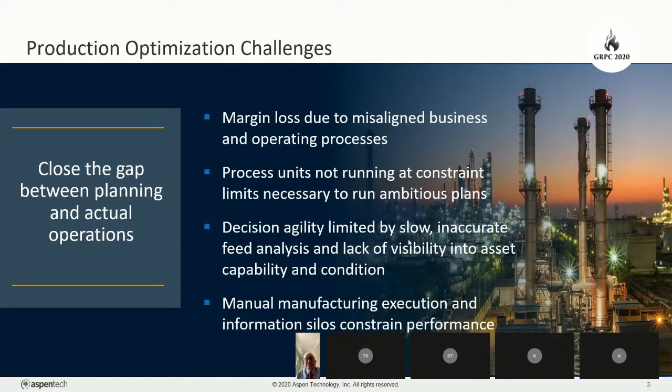To actually achieve plan, decision agility is limited by laborious and tedious manual processes such as feed analysis, or lack of visibility, or both, typically spread across many departments in a refinery. And often, due to these different departments, you see manual execution because information is contained in silos and not integrated across the entire value chain. So that sets the premises for production optimization.

Now, helping our customers implement production optimization is what we're good at. It's what we're proud of. It's what we do every day. Here I've listed some examples where we successfully delivered value, and I truly believe we can do exactly the same for your organization.

For example, we implemented our PIMS advanced optimization platform at a global energy and chemicals company across more than 15 sites. At Rompetrol, we had cumulative benefits of more than $45 million US over a period of 5 years by implementing our advanced process control technology.

So, having said that, I believe there's a gigantic opportunity still to deliver value when you look at production optimization in an integrated fashion. Let's go to the next slide.

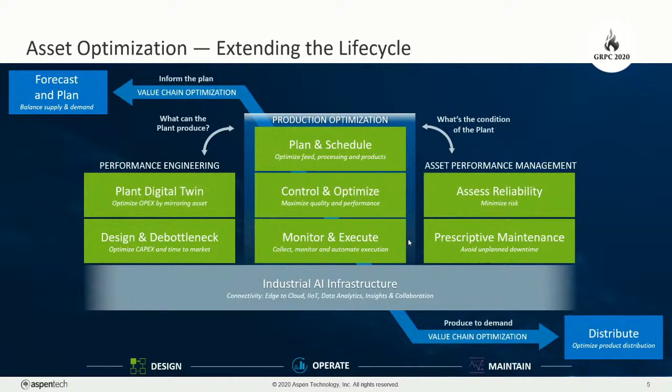We believe we can drive new levels of collaboration, but specifically insights and automation across all these functions by providing industrial AI infrastructure to all our applications, so we can help our customers achieve a higher level of asset optimization and ultimately unlock the smart enterprise. But for today, I'm going to focus on the production optimization bit, which is really the fundamental building blocks for a future smart enterprise or self-optimizing plant vision.

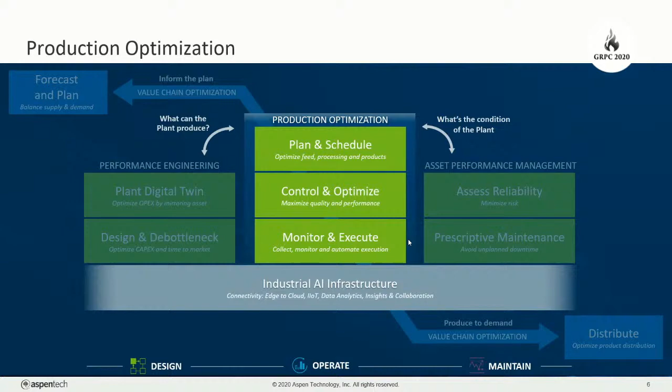So if we look at the production optimization solution, it helps address margin leakage all across your supply chain by connecting all of these business processes into an integrated workflow, as you can see here. Our production optimization is a unique solution that provides a holistic, integrated solution that unifies all these different functions. So when we look at the different layers, the first one is the digital twin.

Is your planning model up to date? Do we have the latest representations in our LP? Do we have a tool available that can use machine learning and smart algorithms to provide timely failure alerts? And that could feed into the planning and scheduling layer, where we do planning and scheduling, right?

Feedstock purchasing and scheduling - we adjust the operation based on day-to-day disruptions, which could be maintenance related, feed logistics, or product downstream delays that could cause the plan to not be achievable, and the schedulers then have to re-optimize the plant. That's why we see planning and scheduling hand in hand throughout the operating life cycle of a manufacturing plant.

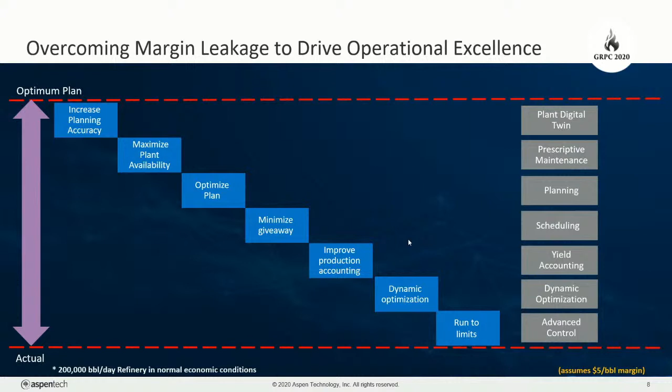Okay, so why is margin leakage so important? We saw in the previous integrated diagram that if one of these functions is suboptimal, there is margin leakage, and this slide illustrates that very nicely. This is based on our internal experience with many clients globally, and it's indicative.

What you can see, for example, if somebody would not have an integrated planning solution in place, that the margin leakage could go up to 50 cents a barrel, and the synergy between all these different functions, we believe, drives very high values and goes into the tens of millions of dollars per annum, depending on your complexity and depending on the throughput of your plant.

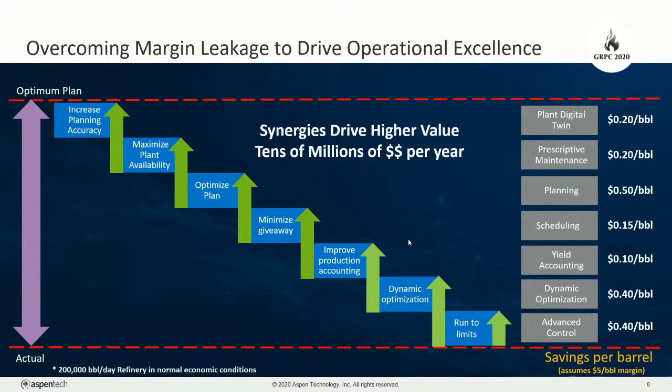Okay. And I think this is a very, very compelling reason to minimize margin leakage. And this slide, our GDOT solution, is basically a platform that is used to solve a variety of coordination, but also optimization problems in refining and olefins.

So the GDOT models themselves derive from our planning models, for example, FCCs, hydrocrackers, reformers. And so the reactor models in GDOT are similar to refinery LP models, albeit that we actually include non-linearity there where we feel that is beneficial, such as a conversion unit, an FCC, or a hydrotreater for that matter. And so they are more detailed models than you would typically find in an LP model.

And for this reason, GDOT actually incorporates best of both worlds. On one hand, it's similar to LPs, but on the other hand, we incorporate more detailed and complex models to accurately represent the units. And as you can see here in the scheme, it's a closed loop optimization.

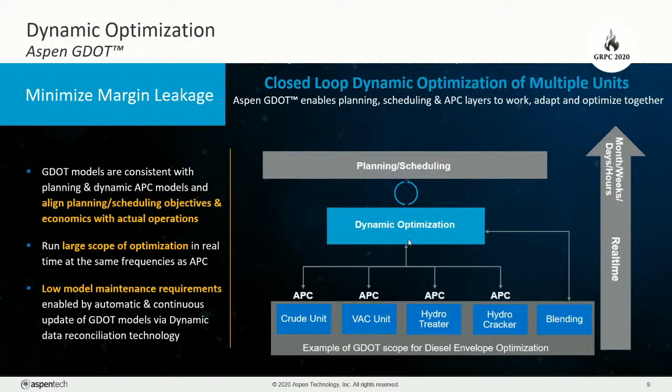Here you see an illustration of our gate-to-gate scope of optimization, and as you can see, here's a middle distillate envelope. Our solution actually is a flow sheet driven interface with a standard database for different process units, and so setting up these models will allow consistency with planning and scheduling as they are in the same application. These pre-configured templates also simplify the maintenance for the user and allow users to focus on analyzing the results rather than focus on complex model integration.

So, what are some of the key success stories? In distillate processing, we've shown to increase overall diesel production by 10% at certain clients, and also reduce the average quality giveaway, and this was worth $4 million to $10 million per annum.

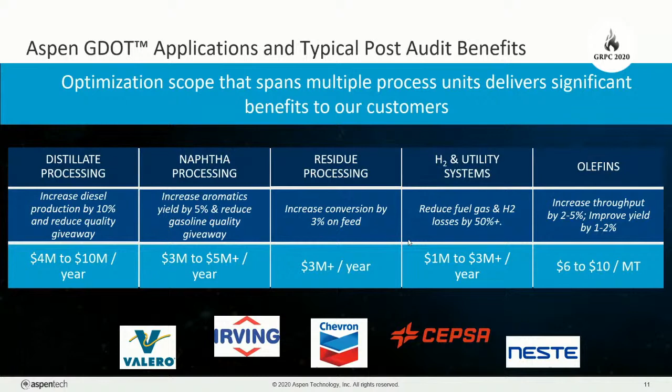So many global companies have already implemented GDOT. You can see here some of the logos, a sample of customers that have actually presented at public seminars and public events. As you can see, GDOT has quite a wide range of useful applications.

So here's a case study. The refinery here was the Pembroke refinery, a Chevron refinery in the UK, and they wanted to go beyond the individual APCs and improve the profitability of the refinery. So we applied GDOT there, and it optimizes entire production trains from middle distillates to kerosene and even naphtha by coordinating multiple process units, all closed loop, with optimization cycles of around 1 minute.

And actually we achieved a 10% increase in diesel production, which in that year was worth $10 million per annum increase in margins. And a quote from the refinery is that the GDOT system allows operating instructions and strategies to be consistently implemented, minute by minute, day and night, on the weekend, all driving towards a more profitable and consistent operation, and reducing the margin leakage. So this continuous coordination is really the key to success in production optimization.

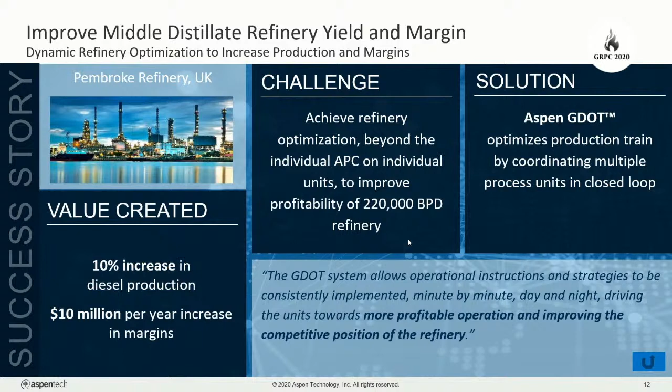Finally, if you remember, I presented the digital architecture earlier, and another key dimension is asset performance management. Unfortunately, today I only have 10 minutes, so very quick. Actually, with our asset performance management, we can expose the condition of the equipment or process by making prescriptive maintenance information available to the planning department. So this enables you to plan interventions ahead of time to either reduce the maintenance cost or to improve the margin leakage that could be caused by an unscheduled event, because you can plan for it well in advance.

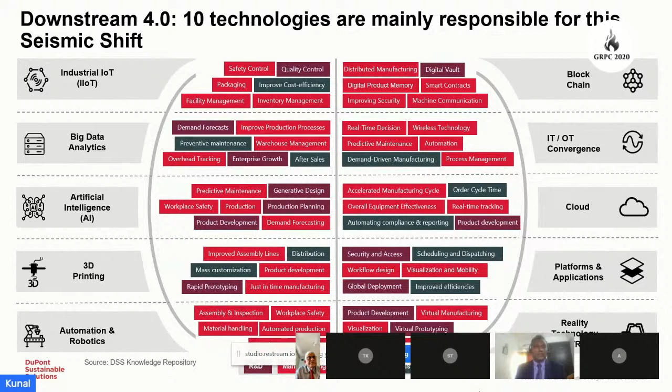And then the why and how part, is it understood even by the management? What are the implications of not transforming, of not adapting to completely new ways, taking a bold step and transforming the organization? And how to do it in terms of process, technology, and more importantly, people - how to develop a culture of change which is accelerating.

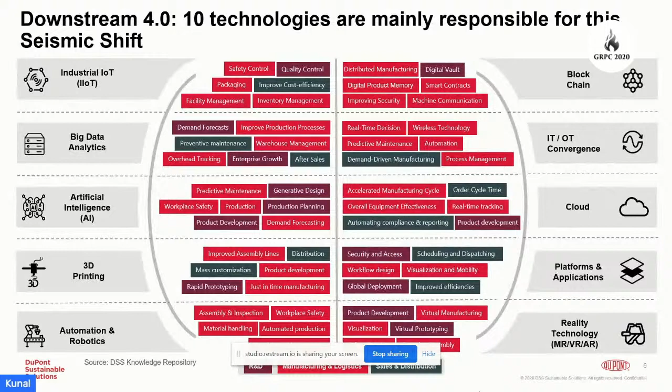A lot of leaders are having a thought around culture and making it one of the key aspects of the transformation that is coming in. Because culture transformation is an implicit part, and often the part which makes success a reality. Without cultural transformation, success can never be achieved.

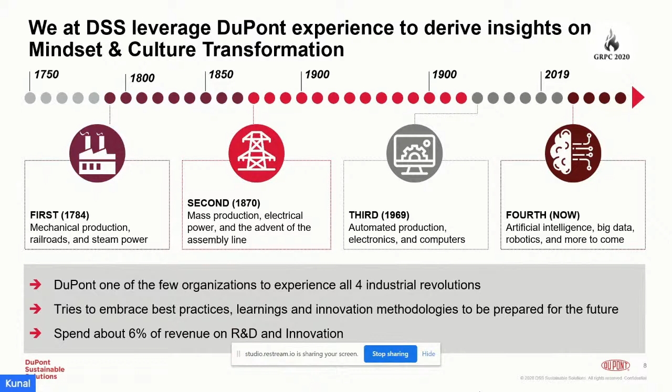At DuPont Sustainable Solutions, we leverage the DuPont experience to derive insights on mindset and culture transformation. At DuPont, we have experienced 4 industrial revolutions, starting with mechanical production and to date with the new technologies coming in. And so we derive our best practices, learnings, and methodologies from what we have seen during this course of time and what we have learned and implemented.

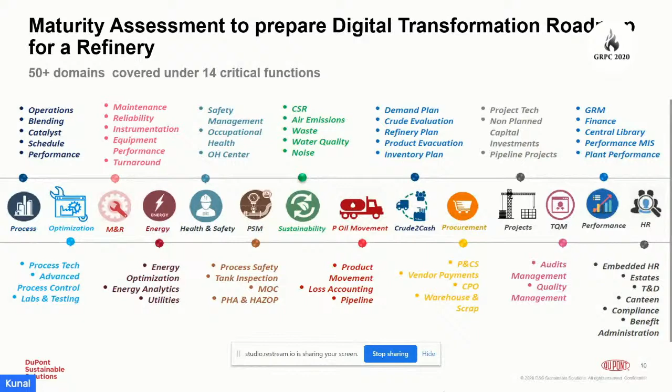The approach that we adopt is in terms of process maturity and digital maturity, with the people aspect inbuilt in both process as well as digital.

For example, if we see for a low process and low digital maturity, in an organization where the processes are not really matured, we need to enhance the process, find the gaps in the process, enhance them, and enhance the systems. Accordingly, the competency of the people also needs to be enhanced to that level to make it a success.

Going on to the second dimension, which is high process maturity but low digital maturity, we need to upgrade the systems and let people know what upgradations are required and how the systems will function.

Similarly, on the low process maturity and high digital maturity quadrant, we try to do a system integration, a dashboard connectivity, so that people can understand how things are integrated and enable the functioning of the processes accordingly with the digital maturity available.

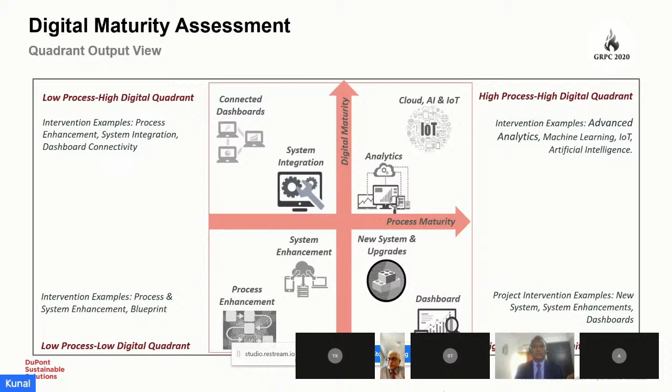The final quadrant of high digital maturity and high process maturity requires significant efforts in terms of competency building and deployment of technologies, be it advanced analytics, machine learning, Internet of Things, or artificial intelligence.

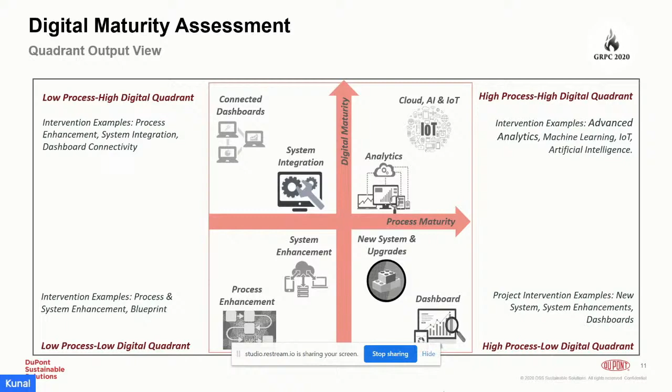After doing this whole piece, assessing each domain onto this methodology, we also do a business criticality assessment of each of these domains in terms of how critical it is from a business standpoint, so as to prioritize the investment in implementation.

We do an assessment including people as a part of both process maturity and digital maturity, and then talking with people, getting their views, and understanding from a business standpoint, we give a business criticality score to each of these. And then we define the interventions that are required in each of these domains under a particular function, going across for all functions and then enterprise wide across the value chain.

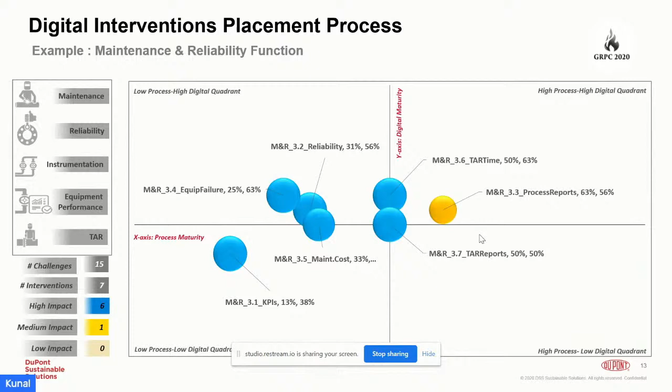So then we placed around 7 digital interventions, 6 of which had a high impact in the organization and 1 had a medium impact, be it turnaround time, process reports, and so on and so forth.

Then we did a project plan around each of these implementations. The duration, everything is mapped out in this particular chart. The digital interventions take a little time, but the organization capability and the transformation from a culture specific point of view takes a longer time. This is where we help our clients in hand holding, making people understand the technology implications and bringing turnarounds.

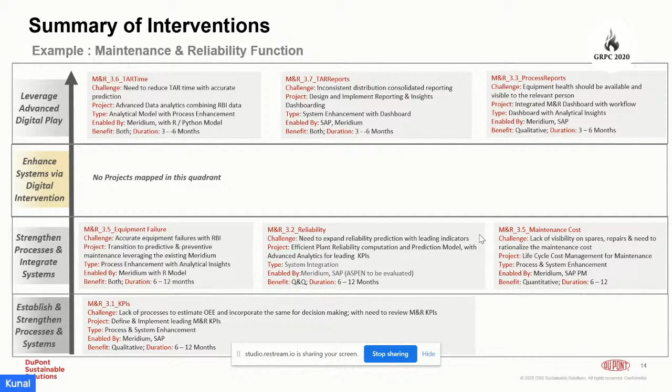Similarly, from a digital assessment perspective, since we have taken the case of maintenance and reliability, the suggestions for IoT came up, integrating them with the asset management software so that the maintenance in charge can get equipment health in real time through KPIs in terms of demonstrated health meters, correlate cost of failures, predictive failures, and frontline maintenance personnel can automatically get generated schedules and alerts to take action.

We did it across all 14 functions and then gave a business criticality score in terms of prioritizing the investments, and then developed a roadmap taking into account and addressing three challenges: one, the complete vision; two, the scalability part across all levels in the organization, across functions and across the value chain; and third, building a competency roadmap for the people to achieve that.

With that, I'd like to end my presentation in the interest of time. Thank you so very much. For a detailed conversation, I'm available. My email address and phone number are given there.

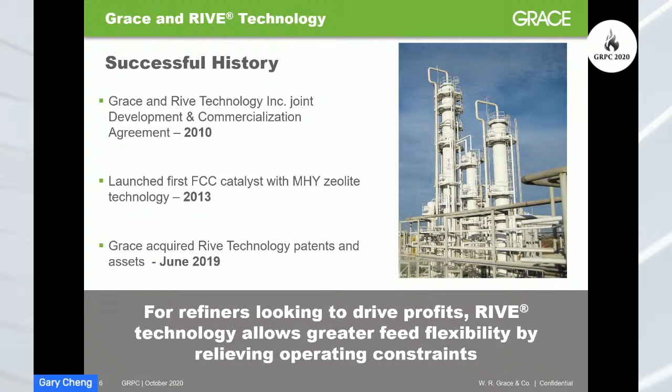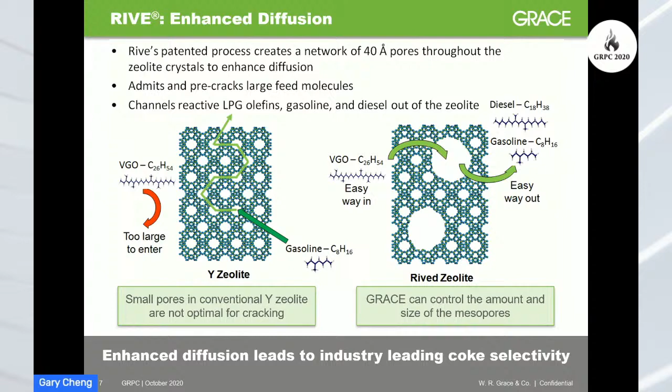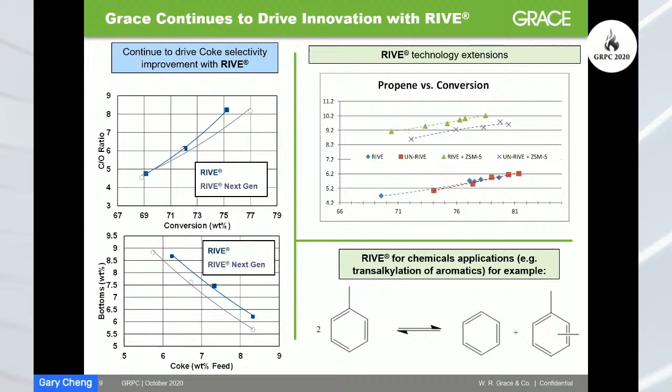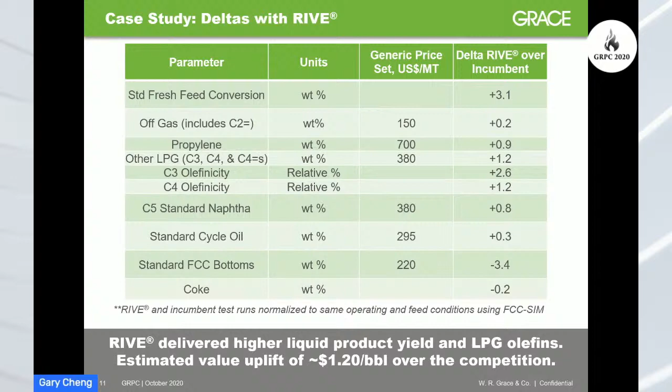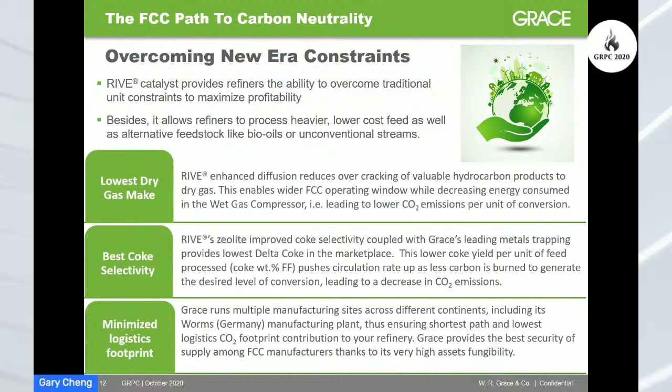As mentioned in my earlier slide, while we talked about Rive technology and catalysts, we're also very excited to share some news about a recent trial for Xavanti, which is the latest additive available from Grace. This is the first public forum where we're sharing the story, and I hope you find it interesting.

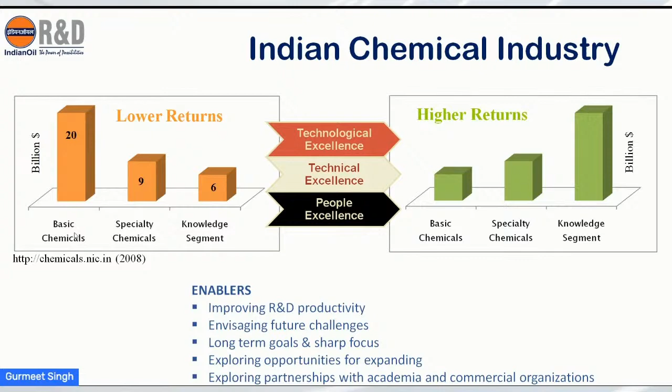Regarding academia, Indian Oil has got agreements with a lot of academic institutions. Just to give an example, we run joint PhD programs with IIT Delhi, and I also happen to be guiding one student. So it allows us to expand our credibility and also expand our expertise.

And if we talk about innovation, we have got a very beautiful R&D center at Faridabad, and you are welcome to visit it sometime. It is on the south side of Delhi, around 35 kilometers from the Delhi center.

At our center, the Petrochemical and Polymer Center, we are working under different platforms, and in every platform we are championing intellectual property. Every program is innovation driven. We do things differently. We look at things differently.

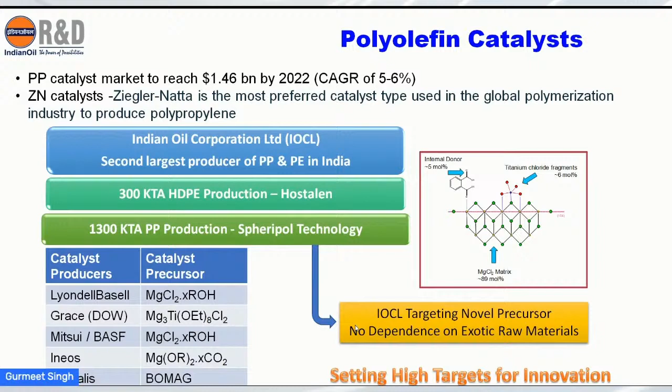Now, what is happening is that companies like Basell, Mitsui, BASF, and now even Clariant, everybody is using magnesium dichloride, MgCl2. Again, the mandate was given to us to develop the process for this catalyst production. We decided to keep our targets high for innovation, and we should target a novel precursor so that we don't have any dependence on exotic raw materials, and we can start the catalyst synthesis with simple, easily available chemicals available within India also.

So we were able to develop novel technologies for producing magnesium precursors, which is the heart for the total catalyst in polypropylene and polyethylene.

And these catalysts are highly specialized, molecularly assembled, with very small crystallite size. When people are excited with the nano range, these catalysts have got crystallite size typically ranging between 40 to 75 angstrom. The catalysts we developed have been extensively evaluated by third parties and benchmarked against commercial offerings, and on more or less every performance benchmark, our catalyst has exceeded.

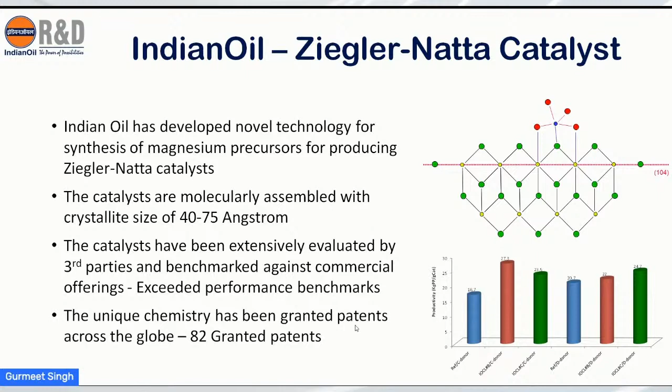82 patents have been granted based on this unique chemistry, and we have extended this chemistry to other fields also.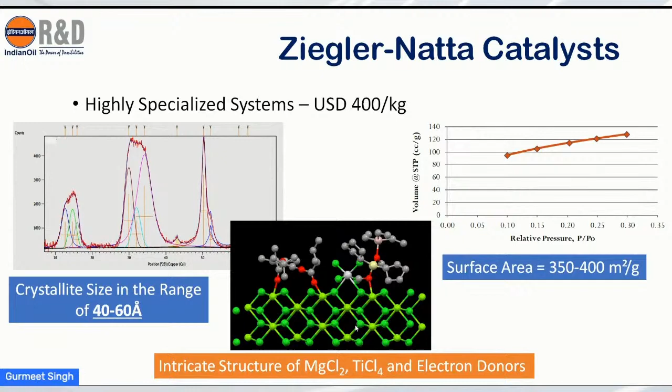We have developed two different precursors, and these precursors are unique to IOCL and patented. They have given us the right catalyst systems for the polypropylene, and these are the few parameters which we have identified.

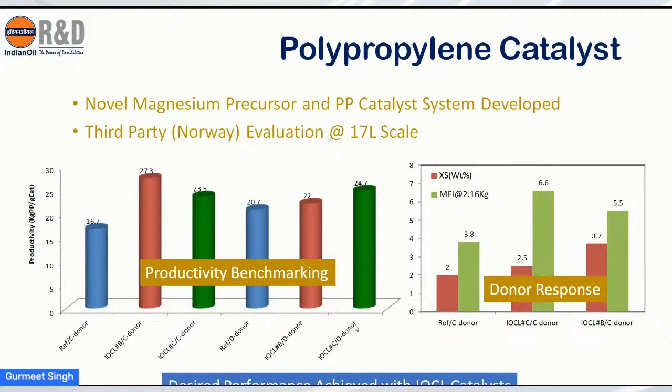The catalyst systems were benchmarked by a third party, and this is the data from a Norwegian company. In the productivity benchmarking and other aspects like donor response and hydrogen response, our catalysts were found to be superior over the commercial offerings.

We have also extended this precursor technology to the polyethylene catalyst. Again, the catalysts have been evaluated extensively in-house and also by third parties, and they have exceeded the productivity and hydrogen response figures of any commercial catalyst. Both the catalysts are now under commercialization.

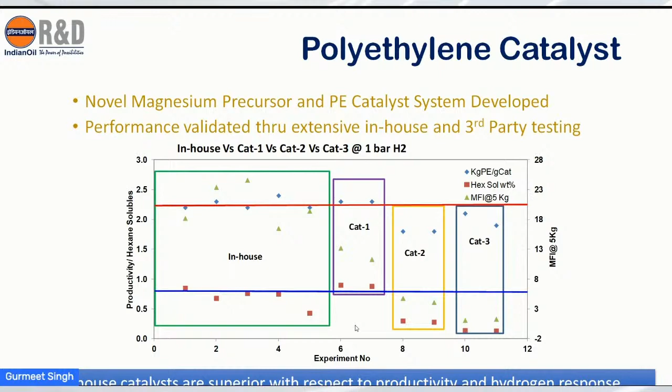We extended the same catalyst technology to produce an entirely different class of polymers, which are the drag reducing agents, with very high molecular weight of more than 20 million daltons. We were able to make this product using alpha olefin polymerization.

This product has been tested at pipeline and given excellent results. After multiple commercial trials, the technology has been established. We have got a patent on this technology, and currently it is under commercialization.

Now, in innovation, we are also moving from in vitro to in silico, and we have established molecular modeling at our end using density functional theory models on HPC clusters, high performance computing clusters. We use this model to funnel ideas so we don't have to do a lot of bench work. If we have 100 ideas, we can filter down to 10, and only those 10 ideas are extended to the actual bench work.

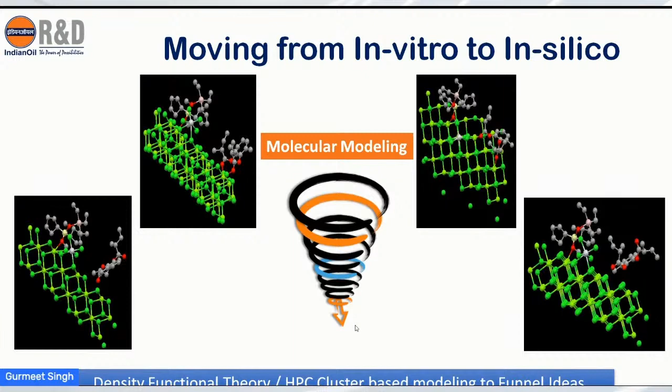In conclusion, our research foray into petrochemicals is purely based on innovation. We are not building upon others' patents or knowledge, we are creating knowledge. We have developed robust precursors using extensive, state-of-the-art technologies like parallel and automated processes.

Both precursors have been established for the production of high activity, high productivity, high stereo regularity catalysts for producing PP and polyethylene. Both catalysts have shown excellent performance with the desired product characteristics, which is also very important. Application of molecular modeling has been initiated to understand performance and funnel ideas, and all our innovation is extensively protected.

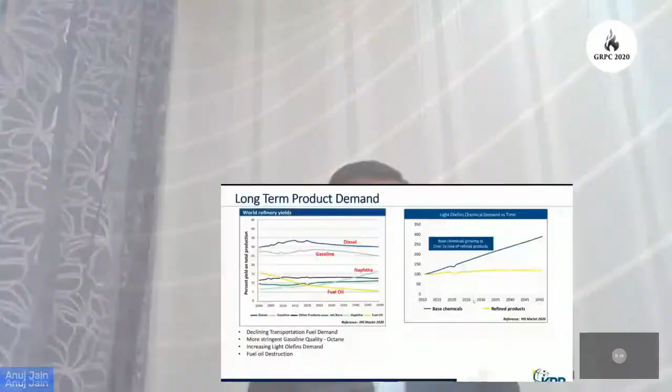So as you see in the graph, on the left-hand side, there is a declining trend for transportation fuel, both diesel and gasoline. This declining trend, one of the main reasons, is because of a significant shift from hydrocarbon fossil fuel to non-fossil fuel, which is mainly led by renewable energy in the form of solar, wind, and many other forms.

With this declining trend, nobody knows what will be the pace of this decline over the years, but directionally it is sure that this is going to decline in the coming years. On the other hand, you can see fuel oil, and this has also declined over the last many decades. With the implementation of IMO 2020 for bunker fuels, it is expected to decline further and be reduced in future.

Now the resultant of all these trends is basically that we have excess naphtha in the refinery, and this is almost a direct result of that. Also, if you see the right-hand side graph, there is increasing light olefins demand, which basically means you need naphtha to meet the petrochemical demand. The demand for petrochemicals is mainly driven by GDP, and countries like India, China, and the Asia Pacific region with growing population are driving this trend.

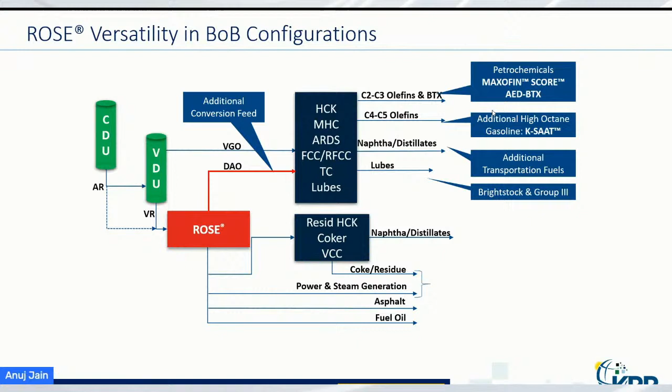One route is to route this pitch into a resid hydrocracker or delayed coker unit, or also a VCC, which is Veba Combi Cracking, a technology by KBR. From that, you can convert this pitch into naphtha and distillates, which can be used as additional transportation fuels. So till now, you have seen that by putting in a ROSE unit, you get additional feed and several various components out of the conversion unit.

Now we have to see how to handle the pitch in some other options. One of the options is AIMS, which is Asphaltene Integrated Management System. Here, pitch will be solidified and converted into flakes, and these flakes can be used in the cement industry or steel industry as fuel. KBR has a modularized solution for this unit, and it can be very well integrated with the ROSE unit.

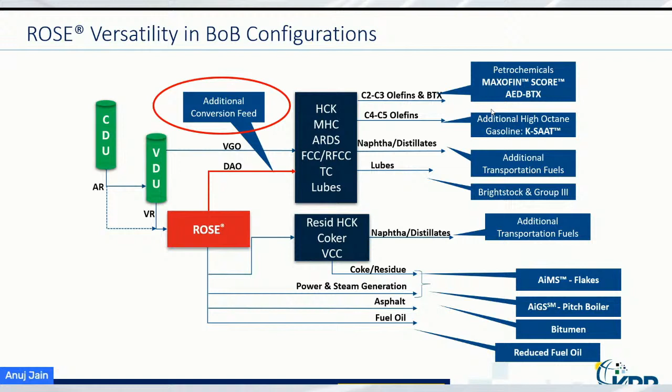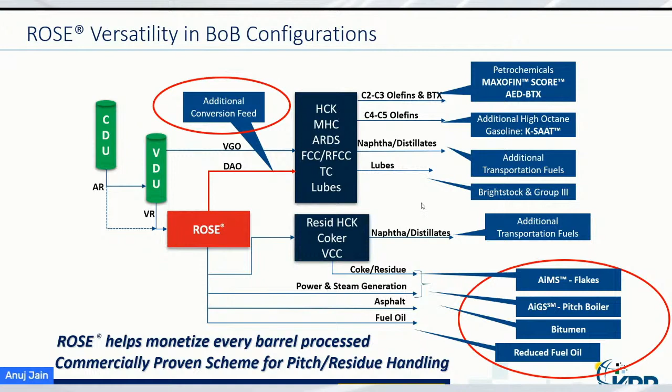Another option is to use this pitch directly for power and steam generation. With this, we have a solution for the asphaltene integrated system, which is a pitch boiler. We have a collaboration with Mitsubishi, where they have running units where ROSE pitch is connected to the boilers, and 3 units are running in Japan. This pitch can also be used for making bitumen, and with all this, we are going to reduce fuel oil generation. So overall, with the ROSE unit, we can monetize every barrel processed in the refinery, and we have commercially proven schemes for pitch and residue handling in the refinery.

I'm going to talk about FCC. KBR is a pioneer in FCC technology. KBR developed the world's first known commercial FCC unit at Louisiana in 1942, and also designed some of the first VGO and resid crackers. Since then, KBR has executed more than 120 grassroots units.

If you see the timeline from 1942: in 1961, we came up with resid FCC. Then in 1998, Maxofin, mainly to produce propylene. And in 2006, we came up with a new disruptive technology, which is K-COT. In this technology, we can use C4, C9 olefinic stream, and the reactor we are using is the same reactor as in FCC, with some changes in risers, temperature, pressure conditions, and proprietary catalyst. With the help of that, we can produce more propylene than ethylene.

K-COT can be integrated along with a cracker and also as a standalone unit in refinery and petrochemical configuration. So this is a quite unique technology, and it will give more propylene than ethylene, and we can get a ratio of up to 2:1. Commercially, this unit is well proven. We have running reference units, and we can take benefit of this technology going further.

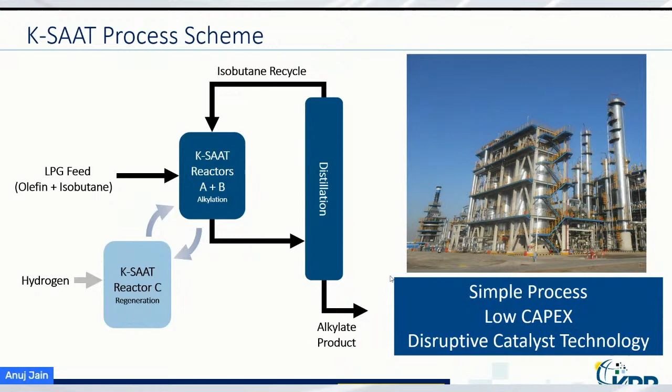It's a simple process, low capex, and we can look into a few key advantages of this process. It's very flexible to process C2 to C5 olefin feed, and the catalyst is proprietary from KBR and precious metal free. It's basically a zeolite based catalyst, so it's very good from an OPEX and environmental point of view. We have a complete modularized solution for this unit, so the unit is very compact with fewer equipment than any other competitive technology.

The catalyst has a 5-year guaranteed life. The regeneration cycle required is more than 24 hours, but the actual regeneration time is quite less, almost 12 to 16 hours. This technology is also commercially proven. We have references, and many projects are in the pipeline in the design phase.

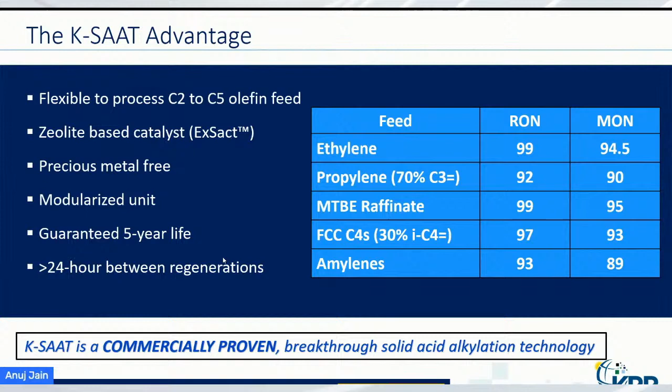It basically uses a regenerable catalyst that isomerizes and separates the isoparaffin products while recycling the normal paraffins over the catalyst reaction zones within the same distillation column. So we have one column for the entire feed, and the last bed will handle C7 and benzene saturation, whereas the first and second bed will handle the C5 and C6 stream.

This innovative design offers an energy efficient, compact, and low capex alternative. It can accommodate high benzene content, approximately up to 20%, whereas other competitive technologies are limited to 5% benzene. It can also handle some amount of contaminants.

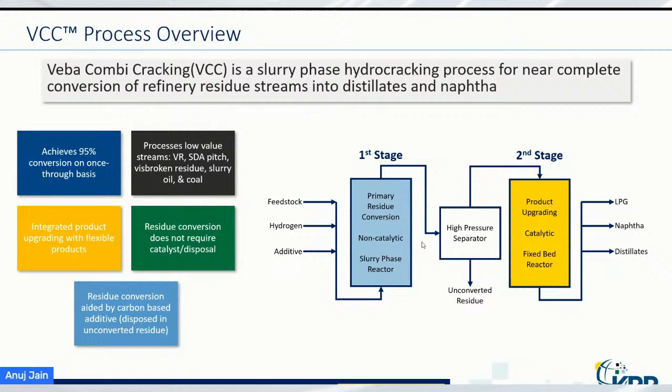From the low value streams in the refinery, we can get LPG, naphtha, and distillates. So it's a very optimized and very unique technology with us.

The key advantages of this technology: again, it's very high feed flexibility, you can put any low value stream and any kind of residue. No catalyst is required for the first stage, as I just mentioned. And of course, high conversion of 95% and above.

Commercially, VCC technology is also proven. We have one running reference unit with refinery residue, and we have 2 units running with coal and other residues.

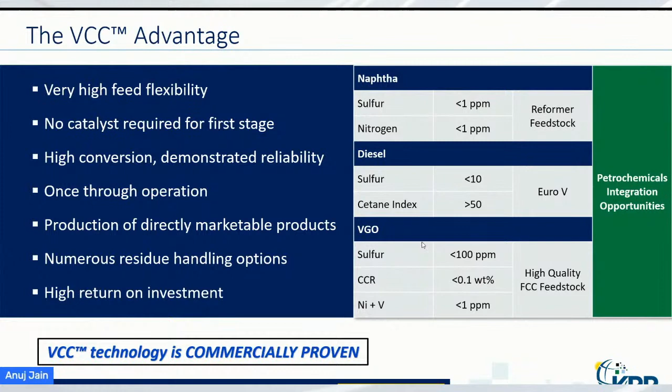So just to sum up my presentation today, I would like to cover a few bullet points. Technology innovation is a continual process with a long-term technology landscape. We need to look beyond what is new to what's next. Innovative technologies and operational flexibility are key requirements to address demand uncertainties.

We expect that residue upgrading, steam cracking, and product upgrading technologies like alkylation will be the focus for adaptation and essential to survive in the future refining market. KBR has some innovative technology solutions to address refiners' challenges. Thank you.

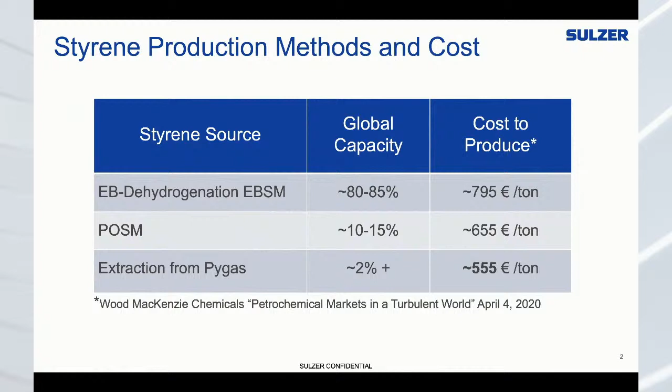The potential of styrene, when we talk of integration of refinery with petrochemicals, this type of configuration is obvious, and more and more crackers are coming. From this cracker, pygas has a potential of styrene from which it can be extracted. Next slide.

Normally what happens in a cracker: C6-C8 pygas is hydrotreated, then extracted to produce benzene, toluene, and xylene. In this case there is no production of styrene, and any styrene present in pygas gets saturated in this hydrotreater. It's very important to maximize the value of pygas based products, because these cracker complexes have to compete with gas based crackers where the yields of ethylene and propylene are much higher.

Unless we add value to these pygas byproducts, these crackers will not be competitive with other world-scale crackers based only on gas. So this valorization can be further improved by extracting styrene from this stream. Can we go to the next slide?

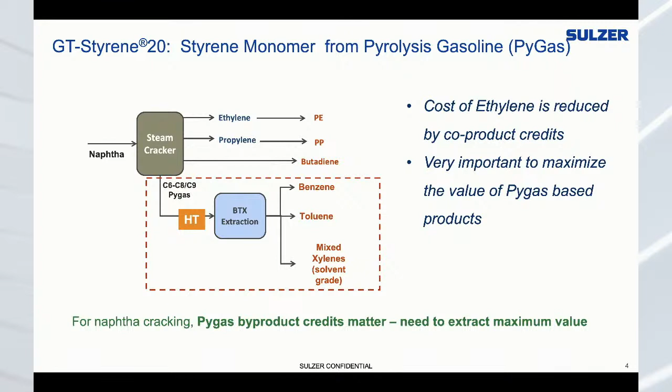Styrene can be produced if we take this C8 hard cut to recover styrene, and the raffinate is recycled back to the hydrotreater, with the rest of the products as in the conventional configuration. So it's a very good fit here. Once we take the styrene out through this extraction, it upgrades the xylene quality, producing mixed xylene of isomer grade. Without this extraction, it's solvent grade due to the high content of ethyl benzene. At the same time, once we recover the styrene, hydrogen consumption in the hydrotreating unit is also reduced, along with other advantages in the operation of this hydrotreater. So this way we are adding value as well as improving performance in processing of the C8 cut.

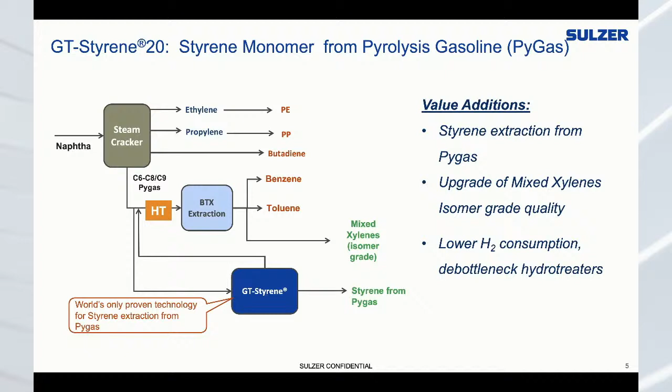Next slide please. For a steam cracker, the potential of styrene: a 1 million ton ethylene liquid feed cracker has potential up to 35 kTA of styrene monomer. Historically, this styrene recovery from pygas was not considered because the right technology was not available, and ethylene crackers were not large enough to produce styrene at economic scale. Typically, a 1 million ton cracker can give us sufficient size to produce styrene on an economically viable scale.

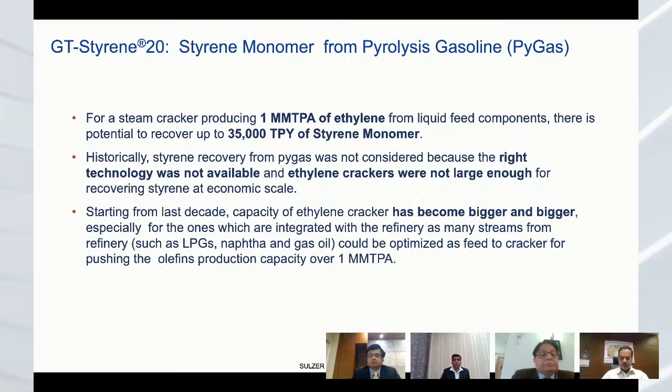Next slide. To extract this styrene, what's important is that it has to be extracted from a mixture of paraffins, olefins, diolefins, aromatics, and aromatic olefins, and these are all close boiling. Let's go to the next slide.

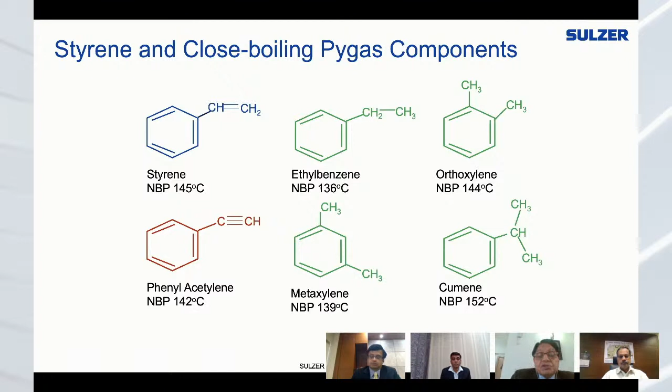This is the styrene molecule, boiling at 145 degrees centigrade, and compared to the other molecules it's very close: 136, 144, 142, 139, 152. So recovery of styrene through distillation is not a feasible way. This gives an idea of the relative volatility of styrene with respect to other competing molecules from which it has to be extracted. With distillation, relative volatilities are of the order of 1.3 or 0.6 in this range. However, with extractive distillation in the presence of a solvent, we alter the relative volatility significantly, making it possible to produce styrene from C8 pygas cut.

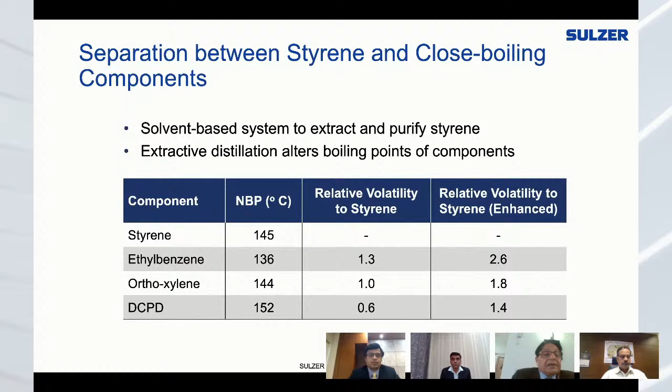So to alter the volatility, a large increase in relative volatility is essential. It has to be done in the presence of a solvent. That's why it is extractive distillation, and Techtiv-200 is the solvent used to alter this relative volatility and produce styrene.

The solvent should be thermally and chemically stable and must be conveniently separated from styrene. Through intensive research and process development, Sulzer GTC has designed an optimum solvent blend, Techtiv-200, customized for this styrene process.

Separation of styrene monomer from close boiling components using Techtiv-200 is still the core of the process. This process GTC has been licensing, and already 3 units are commercially operational, and the core process still remains the same, which is extractive distillation using Techtiv-200.

It includes post-extraction. Finishing includes 4 different processing steps. One can produce styrene in the conventional way using Techtiv-200, but it requires 4 different steps, which has to meet color requirement, sulfur requirement, oxygenates, heavy and polymers. So these 4 steps...

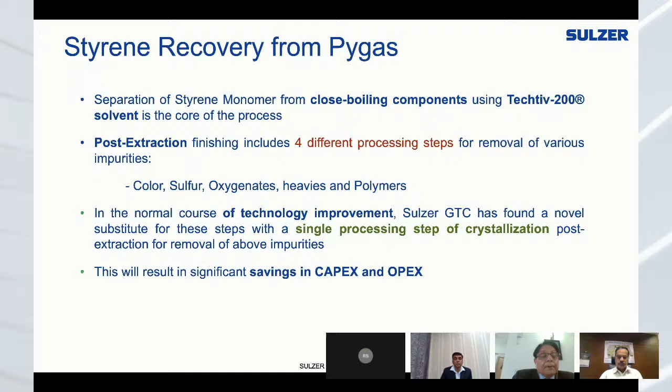Next slide. If you see the first generation process, Pygas C8 heart cut with phenylacetylene was hydrogenated, and it is the extractive distillation step, extract, EDC, as well as solvent regeneration. From this, the extract is subjected to purification steps, which include color removal, oxygenate removal, and sulfur and heavies removal, to get 99.8% styrene monomer.

Actually, if you see, the styrene purity required is achievable here, which is 99.8%. But to meet other specifications of the styrene, these are the polishing steps required to convert it to the marketable product.

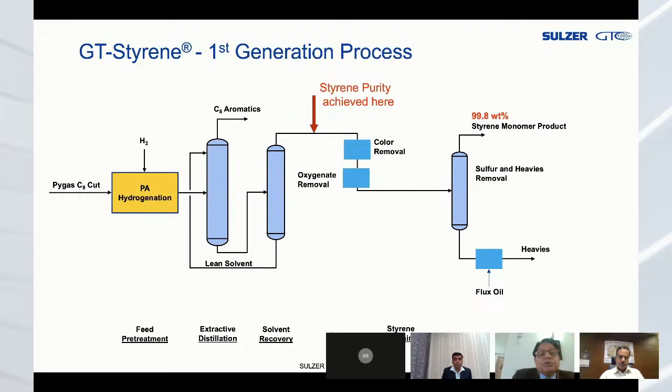This ASTM D2827 specification styrene basically requires 99.8%, but at the same time, these are the color and other specifications which have to be met, and those polishing steps are there to basically meet all these specifications.

Though in this GT Styrene 20, the second generation current extraction process, all those polishing steps have vanished and are replaced by one crystallization-based process. This is a fractional crystallization which allows ultra high purity of styrene, that is 99.95%. In the previous generation we were talking of 99.8%.

Other advantages are a new approach for final purification of the styrene, one step crystallization versus multi-step processing. The crystallization makes an ultra high purity product meeting all the specifications. Nominal purity is of the order of 99.95%, and total sulfur of less than 5 ppm is possible.

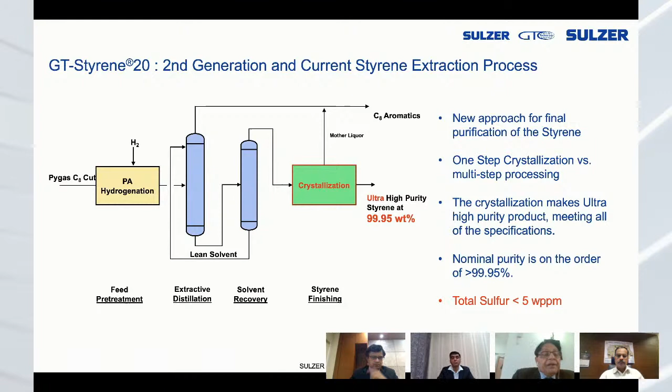Next slide. In the next generation, all those steps are avoided, and we can produce, using fractional crystallization, the ultra pure styrene meeting all the specifications. If you are interested in more details about this fractional crystallization, at our booth there is a brochure available. You can go through that and get an idea.

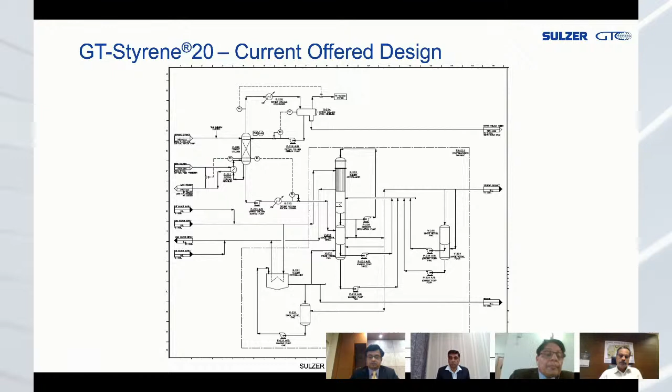This is already a commercialized step for other applications, and these crystallizers are from Sulzer. As you know, Sulzer has acquired GTC last year, and after this acquisition, all those technologies are merged, and this innovation which I am presenting is right now.

Next slide. So with this step, the advantages are lower equipment count because many steps have been removed, lower capex, lower opex. The electricity can be replaced if we can use ethylene from the cracker plant as a cold source for the crystallization unit. A smaller plot area, and opportunity to relax operation of DC8 and other operations,

The purification section design with crystallization is commercialized. This purification section is already commercialized for different applications. It has no moving parts, no filtration of crystals, no use of solvents. It's a very simple and well proven step for crystallization. Thanks. Next slide.

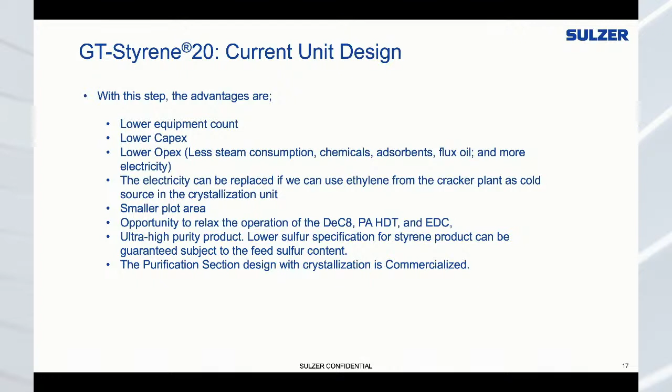This styrene recovery fits well into the naphtha complex, where we can take out the styrene from the C8 cut, recover the styrene, and recycle the raffinate to the first stage hydrotreater. This recycle brings the advantage of extended catalyst life.

Because styrene has been recovered, hydrogen consumption is reduced to half, and xylene quality is improved from solvent grade to xylene mix PX grade, with high value styrene monomer also produced. All these advantages contribute significantly to the economics.

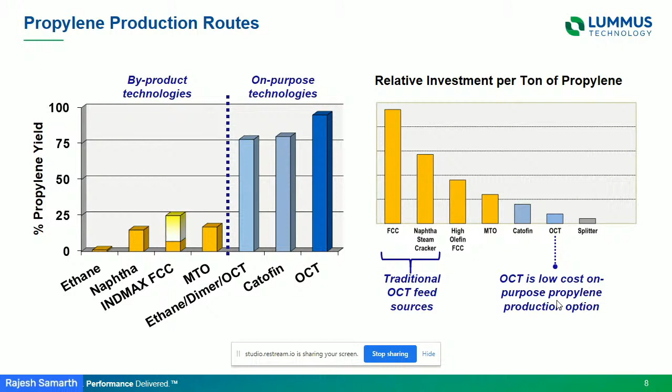So out of which the biggest one is what we call as CATOFIN that Lummus offers, which is a propane dehydrogenation technology. So that actually gives a very high yield. You can see it gives 75+% yield. As opposed to that, all these byproduct technologies, they have yield much less than 25%. If you go to OCT, the yield is even higher. And there is another version of it which we'll talk about, which is ethane dimer OCT. But ultimately, what you find is that for the on-purpose technologies, the investment cost per ton of propylene produced is significantly lower.

Now, OCT is a commercially very well accepted technology with 52 licensed plants. There is almost 10 million tons of propylene capacity using C4, C5 feedstocks together with ethylene for production of propylene around the world. You can see that vast majorities of those are in ethylene plants, but there is over 20% in refinery applications as well. Majority of the units are, really speaking, in China and Far East and Middle East. There really hasn't been an OCT unit in India yet, but hopefully the time would be right now. The capacities of these units range from 50, which is like at the low end, and 750 is the largest size OCT unit that we have designed.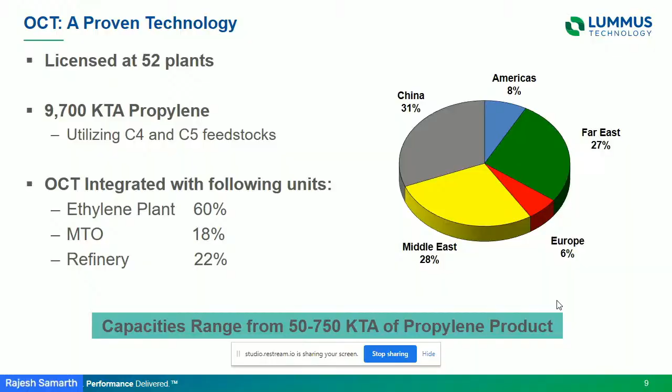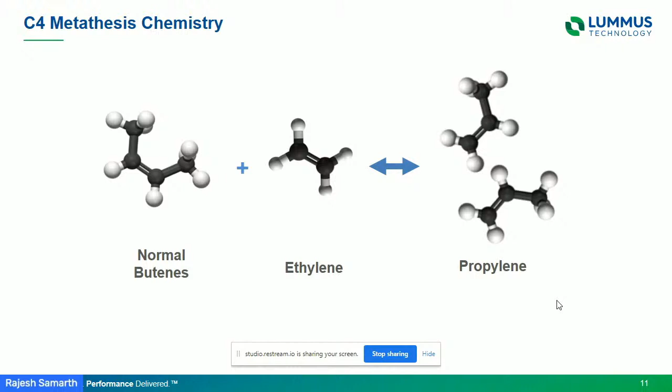So a process overview. Process is actually very simple. It is the standard metathesis process where you are reacting normal butenes with ethylene to make propylene. So a C4 plus C2 makes two C3s. And among normal butenes, the reactive one really is 2-butene. But what happens in the process? 2-butene, 1-butene, there is equilibrium. So as 2-butene gets consumed in the process, 1-butene isomerizes to 2-butene under equilibrium, and you can drive the reaction. So the feedstock is basically, whether it's 1-butene or 2-butene, although 2-butene is in a way preferred.

So there is another version of it, which is a C5 metathesis, in which you can also react normal pentenes with ethylene. So a C5 plus 2 ethylenes, a normal pentene C5, that'll make 3 molecules of propylene. Isopentene will also react with ethylene, but there will be a byproduct of isobutene.

So OCT actually is a very simple process. The first step is the purification of the feedstock. It's a catalytic process, so some of the bad actors such as sulfur, moisture, and some of the highly olefinic and diolefinic components have to be brought down in concentration. So that's the first step.

The second step is just the reaction that we talked about. And then the third step is separation of the products. That's also a very simple step, essentially two distillation columns in which you are separating the C2s from the C3s and C3s from the C4s. C2 is recycled, C4 is also recycled with a purge of some of the heavier byproducts which are produced.

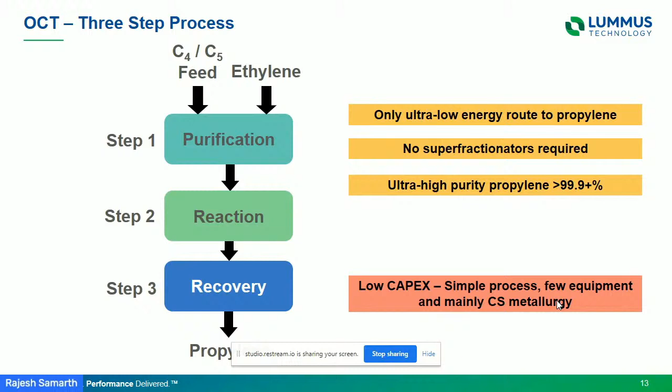If you look fundamentally at this process, there is very low energy consumption, because all other processes for producing propylene require some kind of cracking, whether steam cracker, FCC, or dehydrogenation, so there you need to provide a lot of energy. But this metathesis process is essentially energy neutral between the feed and the product, because really what you have is you are making propylene, there is no propane, so there is no superfractionation required, and you can produce very high purity polymer grade propylene easily. It's a low pressure, relatively low temperature process, simple process, so few equipment and predominantly carbon steel metallurgy, which helps having a lower investment cost.

Now let's talk about how this process can be integrated with a cracker. This is just a typical naphtha cracker configuration that I've shown. From naphtha cracker, you are producing your light products, which has ethylene and propylene. Then you have raw mixed C4.

Typically, most of the time, you will have a butadiene extraction, and then the raffinate one from that. Many places in the world, you will do the removal of isobutene - people will do that, MTBE is one of the examples. Then the raffinate 2 is returned back to the ethylene plant, oftentimes it's hydrogenated and then returned back. Same kind of thing happens with the C5s - the C5 pygas, you are doing hydrogenation of that and returning it back to increase the production of ethylene and propylene.

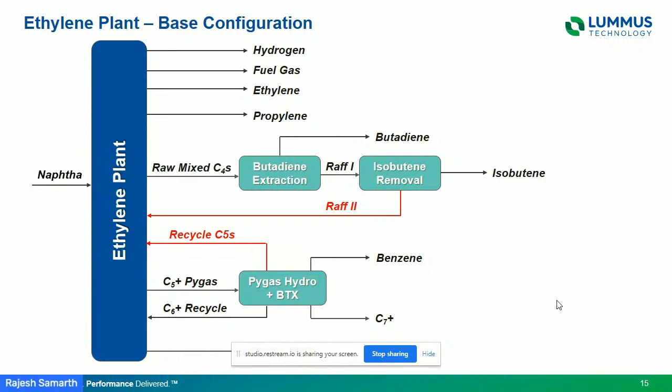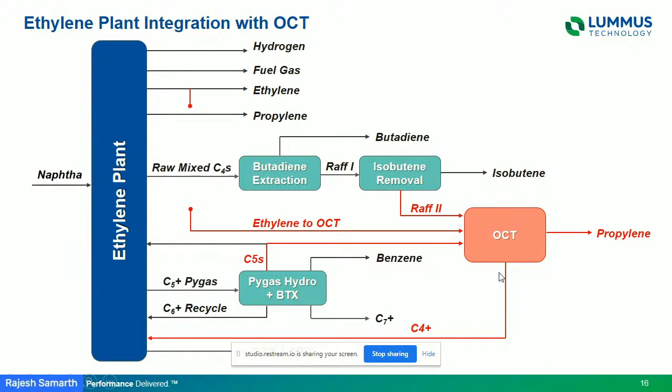Now let's see how this can be modified with an OCT. So what you can see on the red, you're taking part of the ethylene, that's the feed, and feeding that to the OCT unit. The raffinate 2 that you had is feeding the OCT unit, which is basically butene, normal butenes, and some of the C5s you will also send to the OCT unit. So both C4s and C5s will react with ethylene to make propylene, and any of the byproducts can be recycled back to the naphtha cracker. So it's really speaking a simple add-on to the existing naphtha cracker.

Now, this is something important I want to point out to you. Let's look at a typical low severity ethylene naphtha cracker - the P2E ratio, propylene to ethylene ratio, will be something like 0.65. That would be your base case, that's what's making in the cracker and coming in the total complex. Now, if you actually put OCT process, you can operate your naphtha cracker at a much higher severity, which will allow you to go with a lower ratio of P2E of 0.5, so a lot more ethylene production.

But with OCT, you can bring the ratio back again to 0.65. What's the advantage? When you run a cracker at a very high cracking severity, the consumption of your naphtha feed actually goes down, and some of the high value products like butadiene and benzene, their production also goes up at high severity. As opposed to that, in another case, you can operate it in the same manner, but instead of having less consumption, I'm having the same feed going through. If you do that, it will allow you to make higher amounts of propylene, ethylene, as well as all the other products. So you can operate in any manner, and it is much more profitable.

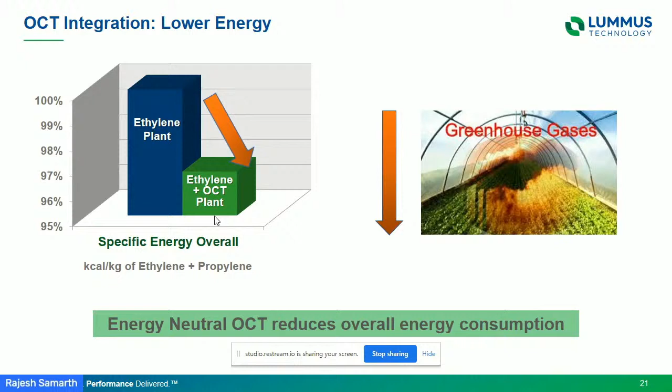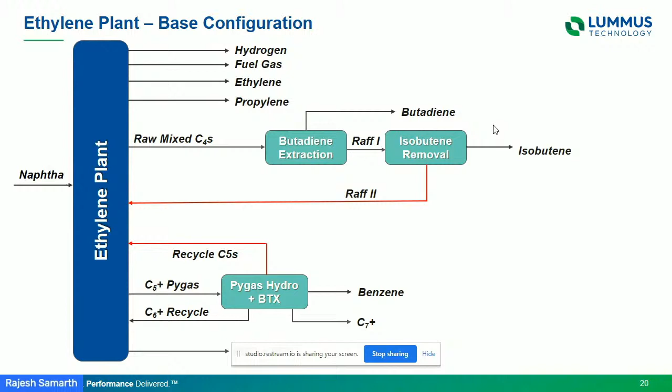Now I'm coming back and showing the same base ethylene configuration. Let's talk about how the dimer OCT can be integrated here. The concept is simple - it's the same OCT concept. Here I want to make significantly more propylene. If I don't have sufficient C4s to do this, I can take some of my ethylene, put it through a dimerization process, and make normal butenes from this ethylene. Then I'm feeding ethylene, whatever C4s and C5s available, all to the OCT unit. That allows me to significantly increase my propylene production.

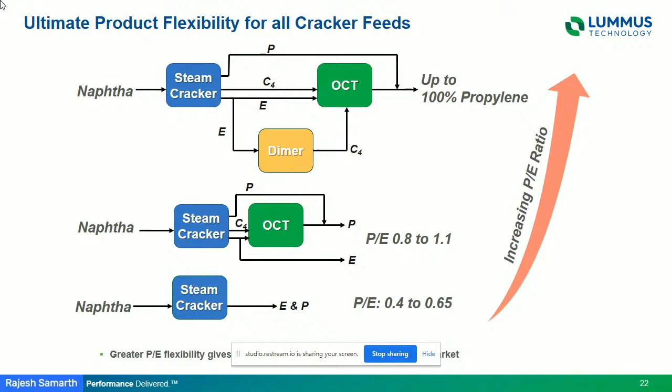So let's talk about how much flexibility we have. At the bottom, it's just showing a steam cracker. Typically in a low severity naphtha cracker, you'll have a 0.65 or so propylene to ethylene ratio. You can go to very high severity to get to 0.4. But if you add an OCT unit to this, you can increase the propylene to ethylene ratio by repurposing some ethylene to make propylene and using the butenes. In the ultimate case scenario, you can literally take all of the ethylene to make butenes, and eventually consume it all to make 100% propylene. I'm not saying anybody is necessarily doing that, but in theory that is also possible.

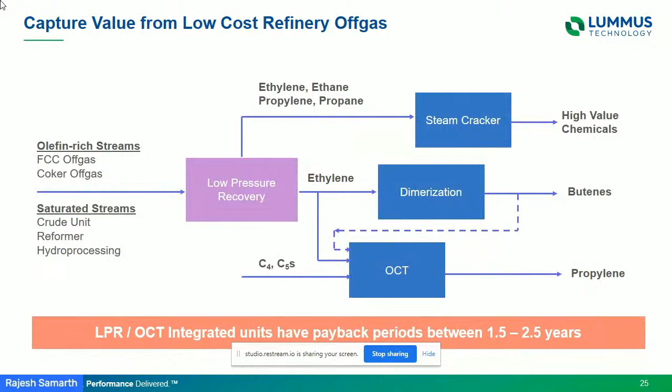Now let's talk about how this process can be integrated in a refinery. The concept is the same. Refinery, especially FCC off gas and coker off gas, has ethylene, ethane, propylene, and propane. We can use low pressure recovery to separate it from others. The simplest thing would be if you have a steam cracker, you send everything there. As opposed to that, you can use the low pressure recovery unit to separate the ethylene, and use the same route.

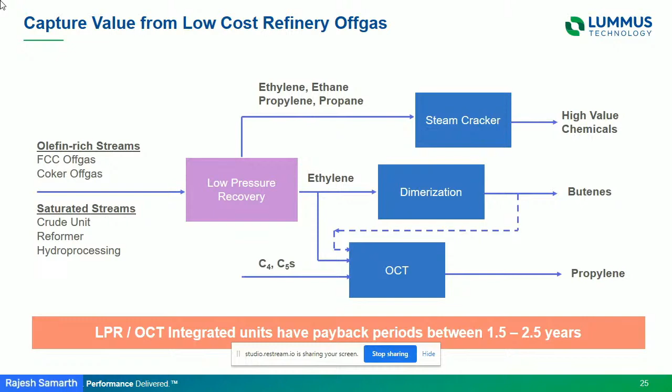You can go through dimerization and make C4s from that and C2s, and with the olefin conversion unit, you can make propylene. These units are also operating currently, showing very attractive payback periods of 1.5 to 2.5 years. So you're taking very low value refinery off gases and converting that to propylene - both ethylene in that, and you recover the propylene.

This is the last concept I'm going to talk about - the reverse OCT. So instead of doing ethylene and butene to make propylene, I'm starting with propylene and making ethylene and butene. Why can I do that? Because on the same catalyst, I can do this process since it's an equilibrium limited reaction. So I can just change the operating conditions and go the reverse way.

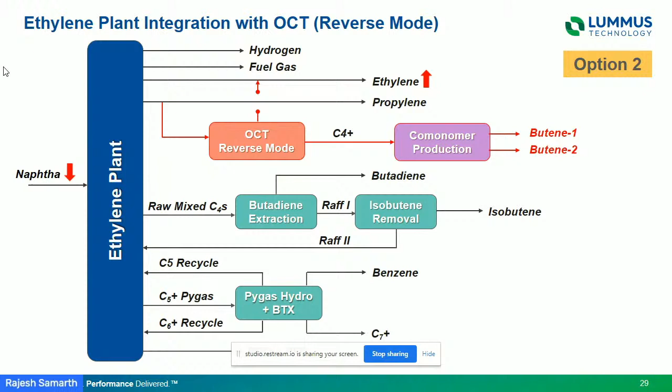The other thing you could do, instead of recycling the C4s back, is use them to make more butene 1 and butene 2, because equilibrium is more favored towards butene 2 than butene 1. But we have technology for co-monomer production which reverses this equilibrium at different operating conditions, favoring butene 1. Butene 1 is a high value comonomer, so you can use it for that as well by doing that integration.

In summary, the olefin conversion technology is a low OPEX and low CAPEX process to make propylene on demand, an on-purpose technology in a very attractive manner. This depends on the relative price ratios of propylene to ethylene. Its integration with an ethylene plant is very easy. It also has the advantage that it can increase production of benzene and even butadiene, the way the process is configured, as side effects. It allows you to reduce the total energy consumption of the cracker and improve the operating margin.

With dimerization, it gives an additional option: if you are short on C4s, you can make C4s by dimerization of ethylene to make even more propylene. In a refinery it's also simple — you can have this process as an add-on to make a very valuable product. This would be a small niche example of refinery-petrochemical integration.

Then there is reverse OCT. The beauty of this is, if you have done some pre-investment to allow the reverse OCT, you can operate your plant either way, because you never know how the prices of propylene and ethylene will be in the future. Depending on that, you can operate the process in a forward manner or a backward manner and maximize your ethylene or propylene.

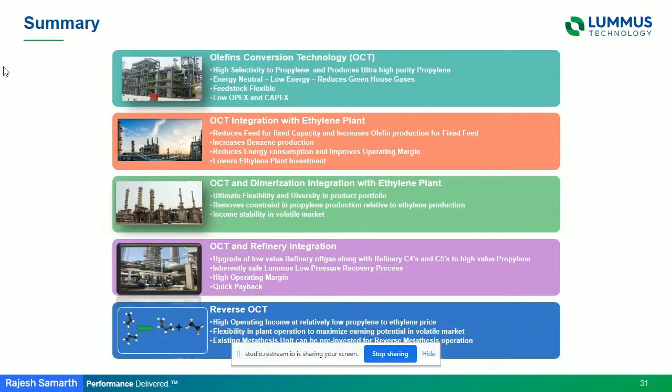So that's all I have. I hope you found that interesting. Thank you.

Again, we showed how the process gives ultra low energy and maximization of yield of the target product. Further, there are a number of integration possibilities, and configurations were also discussed.

I'll quickly go to two questions for you. One asks that, unlike competing technologies which are feed agnostic, here you're dependent on the requirement of naphtha, and the energy requirement comes from the naphtha cracker. These are the two observations — would you like to respond to these?

Yes, it is feed agnostic — you can very well make it work in a mixed feed cracker as well. Actually, what happens is that the more you go towards lighter cracking, whether it's LPG or ethane, your production of propylene really suffers. It goes down as your feedstock to the cracker becomes lighter. So in that case it is very, very useful. When I talk about improvement in operating margin and reduction in energy intensity, yes, that is happening for the overall cracker complex, for the amount of propylene you're producing.

Thank you, Rajesh. I think that's all the questions.

We are already 3 minutes over, we are short on time. So I will sum up by saying each presentation presented various options available for technology innovation — new innovations, small margin improvements that you can bring to maximize product demand. That's a major theme across all the presentations. These are all upcoming technologies. Hopefully, whoever has listened can take it forward by applying it in their own configurations. Thank you very much for everybody for patiently listening. I hand over back to the host.